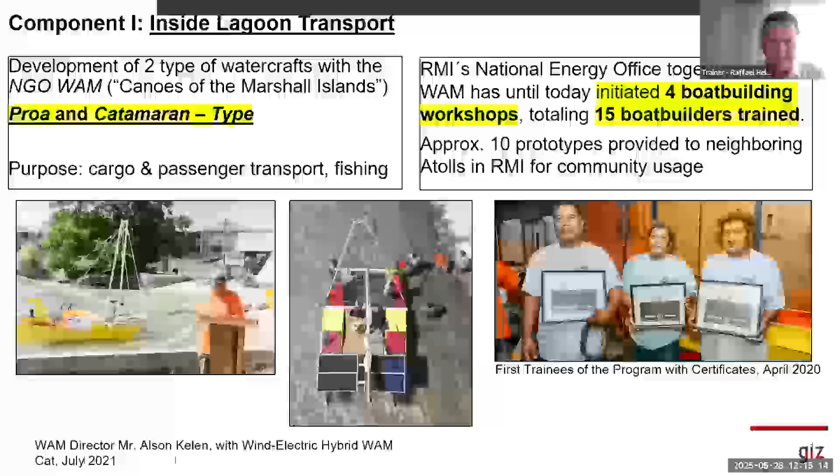As I said, the first component, the inside lagoon component, was one of the components that started first, around 2019. Hendrik was one of the consultants, a boat designer and naval architect, to design new concepts, new boat designs that can be built locally, operated locally by Marshallese people, and as well maintained locally.

This project component is closed from our perspective at the moment, but the National Energy Office has continued to financially support the NGO Waan Aelon in Majel, which means the Canoes of the Marshall Islands, in the medium term, to continue building and deploying those boats.

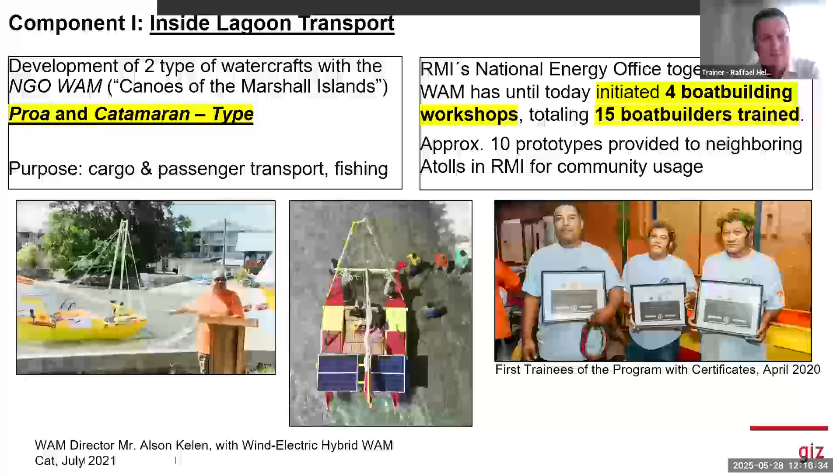You can see here on this slide, at the moment, one of those hybrid designs we came up with as a prototype in 2020-2021, where, to the outrigger catamaran, which you'll see more precisely on the next slide, a small solar panel was mounted together with an electric outboard engine to already show what could be possible with very small, minor effort, built by the people there in the Marshall Islands.

This is not really what I foresaw, but I tried to keep track. At the end of the day, this component was concluded last year with the publication of two construction manuals, one for each of those designs. They are publicly available online, the link is shared in this presentation, and you can just download those manuals, and if you wish, you can even build yourself such a boat. We are very happy with this outcome. The knowledge shall be shared more into the Micronesian region soon, and actually the project is continued. I will share a few words about this later.

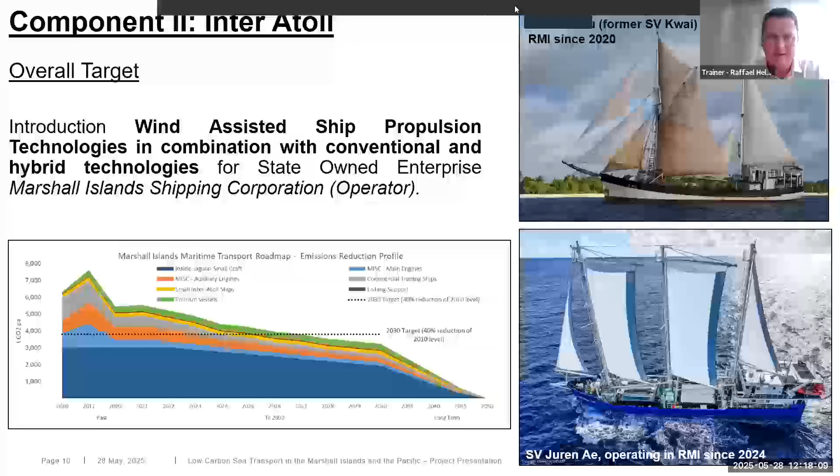Coming to the next part, sorry to cut you. Would you like me to share your presentation instead? Yeah, you can do that. Slide number 10 now. Sorry. Oh sure, all right, one moment. Thank you, that's great. Sure, that's going to be more comfortable, especially now. All right.

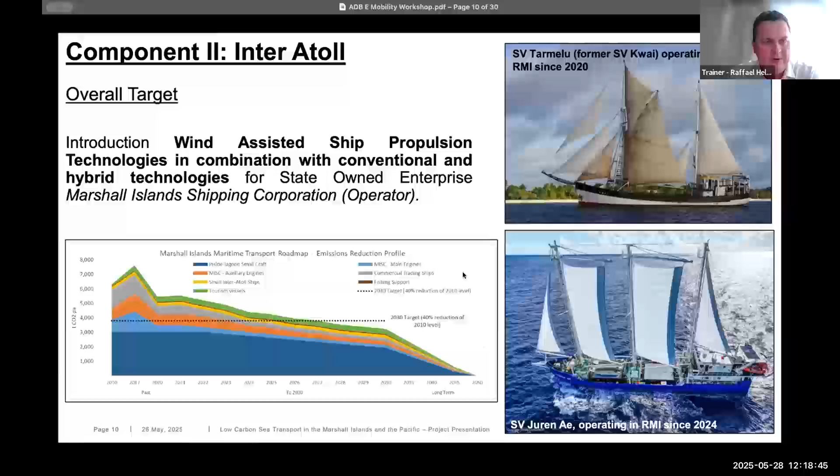More the focus will be on this component. This component is not yet concluded. What you see here on the first slide, the inter-atoll component, is basically what we want to, or what we did introduce for the Marshall Islands over the last few years. The background here is that the Marshall Islands, consisting of about 29 atolls on a very large sea surface area, need and depend on the regular services of ships this size, about 500 gross tons. Those ships are operated by the government of the Marshall Islands, the state-owned enterprise Marshall Islands Shipping Corporation.

The Marshall Island Shipping Corporation, MISC, is by legal act meant to provide shipping services to the outer islands on a regular basis. We've been trying to come up with a concept ship that would operate on much lower fuel consumption. What you see on the right top side is the sailing vessel Kwai, some of you might be familiar with. The Kwai was operated between Hawaii, the Line Islands in Kiribati, and the Cook Islands over nearly two decades, until the Kwai was purchased by the Marshallese government at the beginning of the pandemic in 2020. The Kwai served as a model and a research ground, basically, to develop the Juren Ae, which you see on the right bottom.

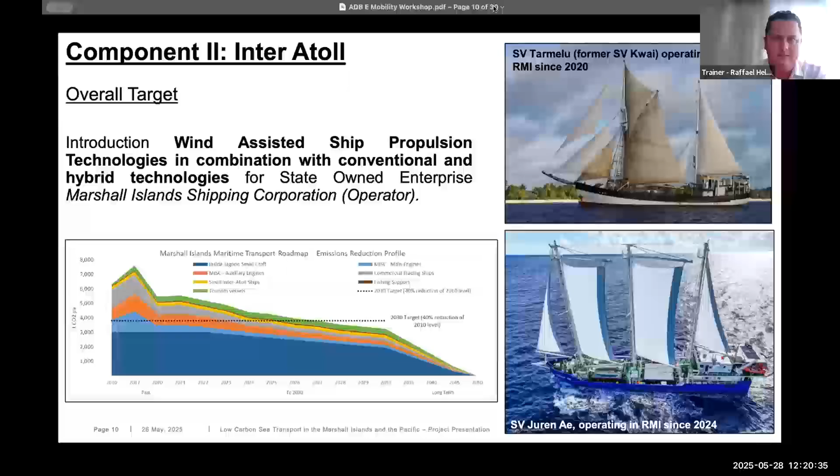I couldn't go over to the next slide. Just a second. Okay, well, thank you, Christina.

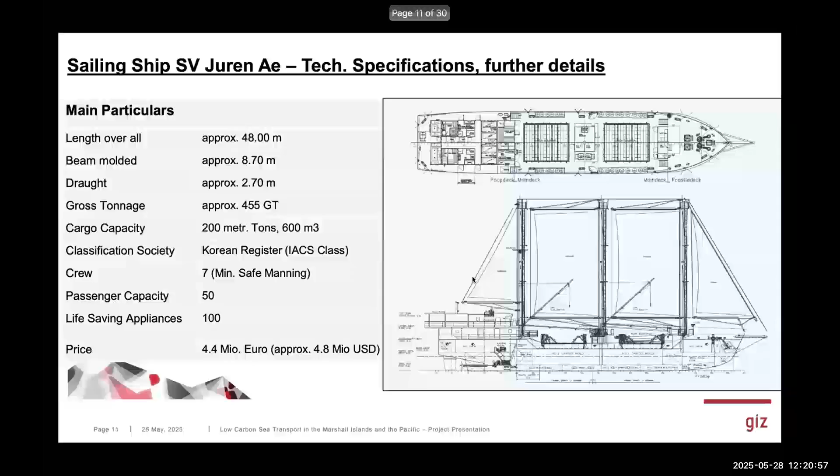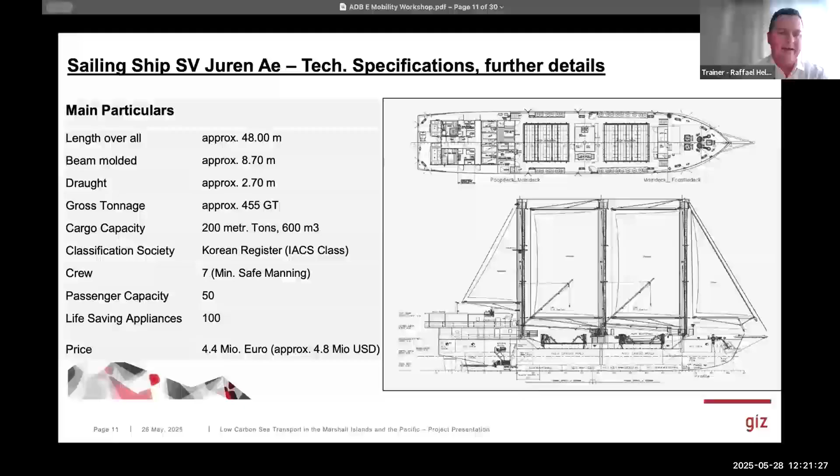We see here the technical specifics of the ship, and I think I mentioned a few already. The ship was built based on a very comprehensive needs assessment in the islands, which we undertook at the beginning of the project. This is the outcome. Eventually, the ship was built in South Korea with a total budget of about 4.4 million euro, which equals about 4.8 million US dollars at the time I made this presentation.

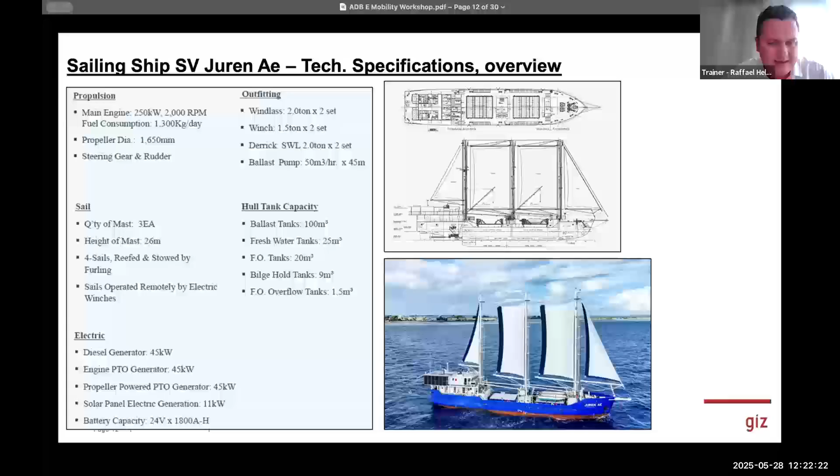There's some more specifics about the vessel. At the end of the day, the ship does fulfill all those very special island requirements we analyzed over the years and is now operating in regular domestic service. I want to highlight that the ship is internationally registered under the international flag of the Marshall Islands, and is also built under IACS class under the Korean register. We are still working on certain elements of the ship, in particular the sailing rig, the Indo sail rig, that was developed in close partnership with the University Emden Leer and other external partners, including the shipyard in South Korea.

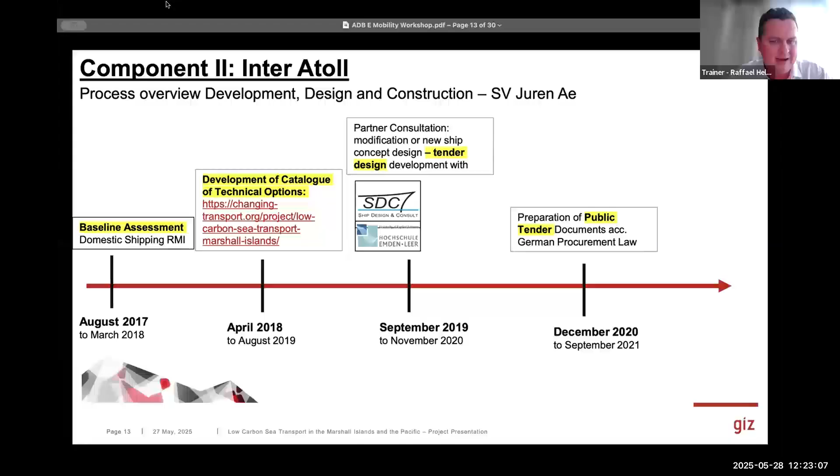Just to give you an idea how long this took: we started in 2017 after a very comprehensive baseline assessment. A catalog of options was developed, and eventually the Marshallese government and all those project stakeholders agreed to build a new ship, to design a new ship, because the alternative at that time would have been to modify an existing vessel. We found this joint decision to go for a new design, and this design process took over the years 2019, 2020, until we could start the tender in 2021.

From the tender, the bidding process, it took another year until the contract got negotiated and construction started eventually in 2023. Last year, the ship was finalized in June. We sailed the Juren Ae over to the Marshall Islands in July, and now she is operating in the Marshall Islands.

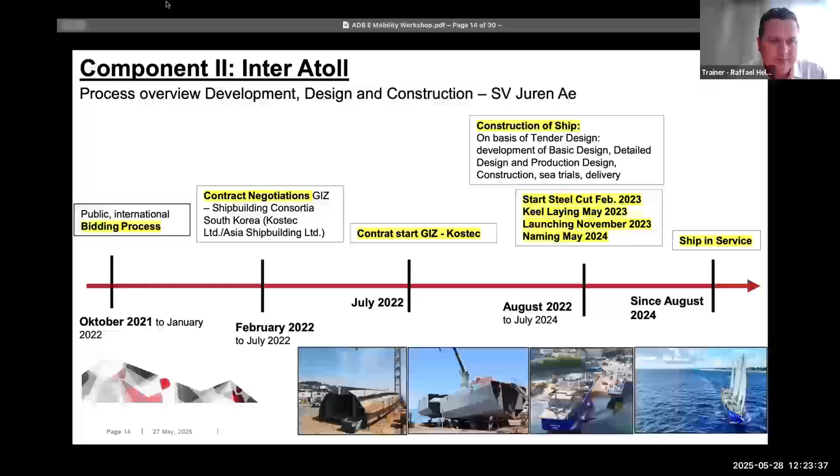As you see, the ship was received with very high interest from the government. In the meantime, I see that neighboring countries are also very much interested in this type of technology. I want to elaborate a bit more in detail, particularly about the electrical propulsion.

One aspect of our work is training. There was a training center established. We're currently developing further courses, also with a focus on electrical propulsion - that's something I'm sure Henrik will mention a bit later in more detail. The training is absolutely essential. Until now, seafarers in the Marshall Islands haven't really achieved a lot of capacity building before, and now this is more regulated. It's hosted by the College of the Marshall Islands, the National College, basically, and the first graduates are already working in the shipping sector now in the islands.

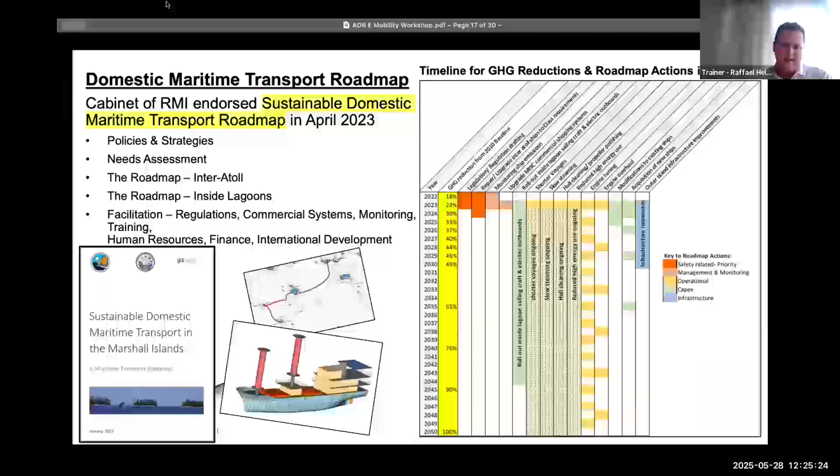One major policy document that got established and endorsed two years ago by the Marshallese government is the roadmap for sustainable domestic maritime transport. This roadmap paves the way for full decarbonization until the year 2050, and is also available if you would want to have a look how the Marshall Islands developed such a document and how they go about implementing the different activities resulting in the final goal to decarbonize the domestic shipping sector in the Marshall Islands.

This will bring us to the last section. I will try to give you a few more details about the electrical components in the new ship. I will start here with the parallel hybrid transmission, PHT. PHT was a system we purchased in discussion with the Korean shipbuilder, in Belgium, with the Belgian company Esco Power, and Esco Power installed this system, and we're now testing it. There's still room for minor improvements.

I can also elaborate on a bit later, but generally what we achieve by this system is basically a higher rate of redundancy in the ship system itself. And of course, we can reduce the fuel consumption and be much more flexible if the ship is sailing. It even allows us, if the ship is sailing in fair conditions, to generate up to 45 kilowatts of electrical power that can be stored in a battery system or fed into the hotel load of the vessel, basically allowing for zero emission ship operation in certain conditions.

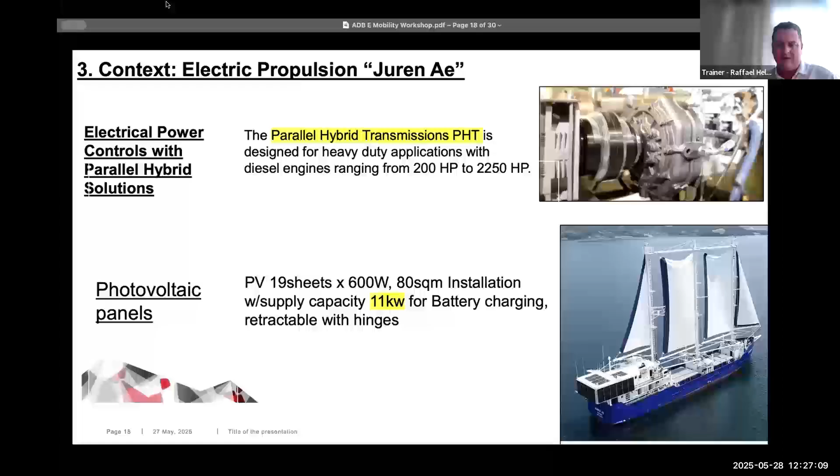As well, the ship is equipped with an 11 kilowatt PV panel system that is retractable, foldable. You can see it on the right bottom side. Now it's basically not in full operation, but when the ship is sailing, those panels on the stern, on the starboard side, would be put up with hinges and then can increase the surface area. We can continue, Christina.

So as I said, this system allows for higher redundancy as well as flexibility. We see five operating modes to propel the ship. For example, we can just use the main engine, a diesel combustion engine, together with the power takeoff mode. We can only use the power takeoff mode when the ship is sailing, as I said before. We can use the propeller in the milling recuperation mode. And as well, we intend to use the power take-in mode, which is not fully functional yet, but this is something we want to continue to develop with the engineers.

That's our mission. Now we have 2 years left. And of course, the goal is to have the best design for the second order. I can say that the neighboring country, FSM, is very much interested to have a similar ship, and those lessons learned will feed into a revised design.

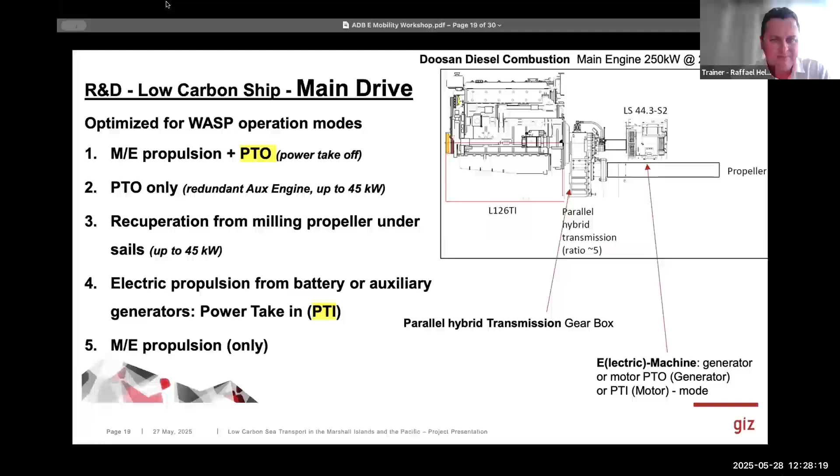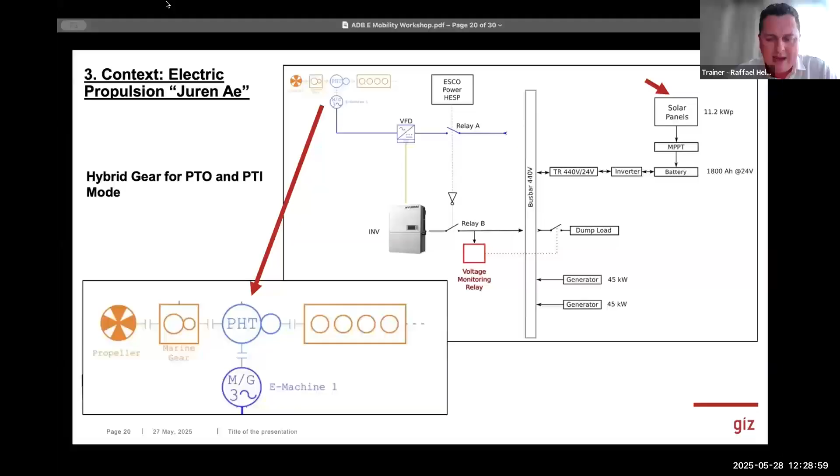We can continue. I think that's another piece of background information. We're talking about e-mobility. The Marshall Islands, since 2018, have had the electricity roadmap in place, and I would rather consider our maritime roadmap as an add-on. We can continue to the next slide.

That's what I already mentioned. Both framework documents are guiding the way for the work that is done in the Marshall Islands. In particular, of course, we're working on the maritime sector, and I'm going to show you just a few more slides before I conclude, because we have 20 minutes.

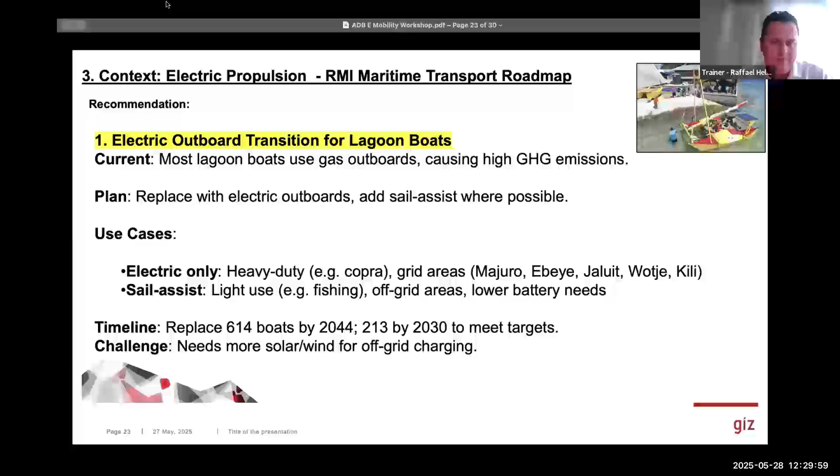Of course, the infrastructure needs to be improved in the Marshall Islands. That's something that is ongoing. I can literally see it being there now for nearly a decade. I can see that the amount of PV panels in the city of Majuro is increasing drastically, and the entire power grid in the urban area is improved over the years. I do see strong improvements in that sense.

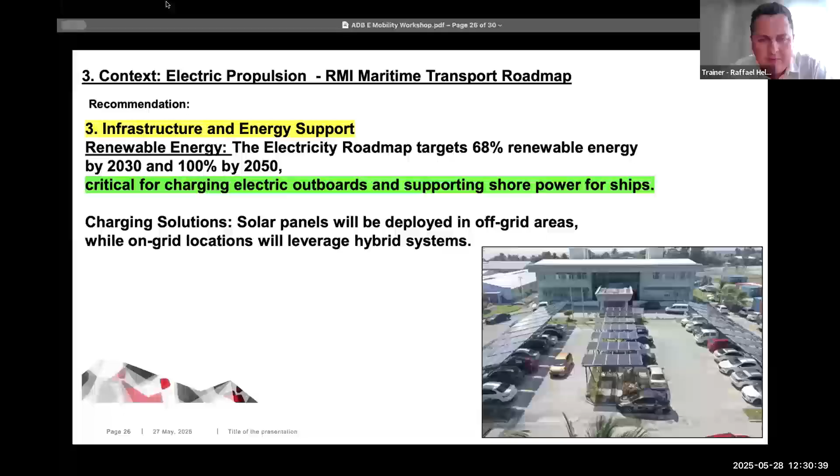The next one, please. Yeah, I think I would leave it to that with my overall insight, talking about the pilot project that is implemented by GIZ and many other partners in the region and globally. We are very happy about the outcome. I can say from my perspective, this is a good start. We've been working there now for 8 years. I think it is only a start. So I think I'm convinced that we have to continue in all those different areas.

And I'm very much excited as well to see now the presentation from Henrik and Jonas, because the interest is there. The people in the islands, they really want to go down this way and use fossil fuel free transportation means, especially in the maritime sector, being so dependent on maritime transport in the islands. I think in the Marshall Islands, we've been lucky to have such strong and interested, innovative partners.

I hope we can extend and share this knowledge in the upcoming years also more in the larger region, but also beyond the Pacific Island region. Thank you very much for your interest and attention. And if you have any questions, I'm happy to answer them. I'm concluding now at 20 minutes because those details I've basically shared.

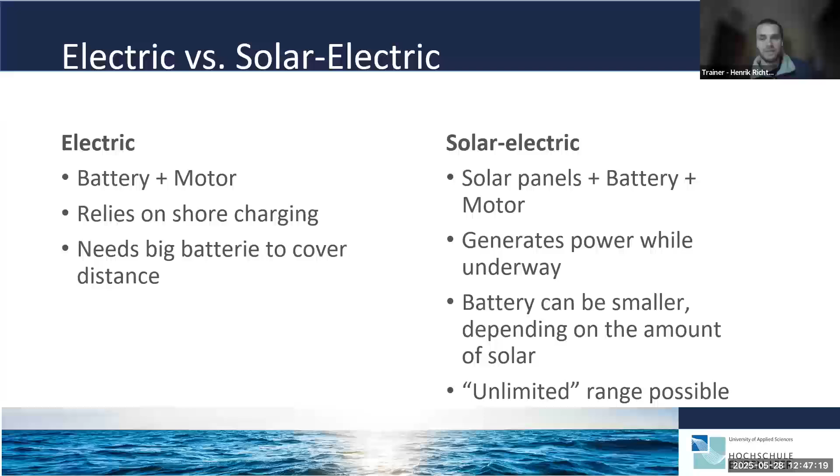In the following slides, I'll be talking about light solar electric craft. Jonas will later also talk about heavy solar electric craft. What I mean by that is we're limiting the system voltage to 48 volts here. That is often done because 48 volts DC is considered safe—you can touch it, you're not going to get a shock. It's easy to handle, also for amateurs. It's usually easier on the regulation side, and just in general safe to work with, and kind of the standard for this size of vessel. Length can be up to 15 meters, displacement up to 15 tons—though then we're already on the pretty heavy side—and propulsion power up to 20 kilowatts.

When you go much beyond that with 48 volt systems, you will either end up with a lot of engines or with very, very thick cables, because somehow the power, the amps, has to go through the cable, and then you need a lot of copper. So it doesn't really make sense to go beyond that. Also, you will have a hard time finding engines.

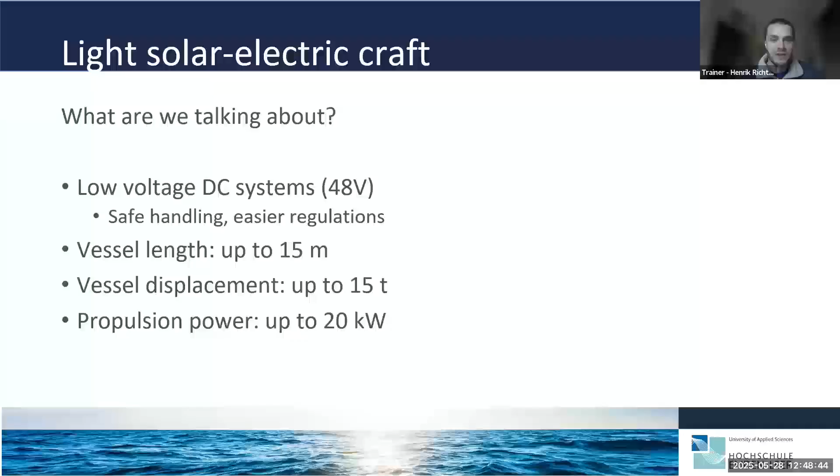Okay, let's have a look at the basic components. What you see in the background is a project we've been working on for UNDP—a design study. It's now going to be built, similar to this one but a bit different, in New Zealand for island supply in Samoa.

Maybe let's start at the engine. Of course, there's an electric engine. In this case, it's an outboard engine that you can just buy readily available. It has the same connectors and same mounting system as a regular outboard engine—looks basically the same. The only difference is it doesn't need fuel, and you have to plug it into a power source.

Usually in these kind of vessels, there is always some sort of battery storage as a buffer, because the solar power is not always reliable. So when you have clouds, or different orientation of your panels, or you want to go at night or late in the day, you have very big fluctuations in your output. So you need this battery to have a constant power supply for the engine.

Theoretically, that would also work without one, but then we are really talking about extreme examples. I've seen some very low budget boats which just connected the solar panels to the engine directly. It's possible, but not really recommended. Battery size, of course, is always a discussion and needs to be carefully designed for the intended application.

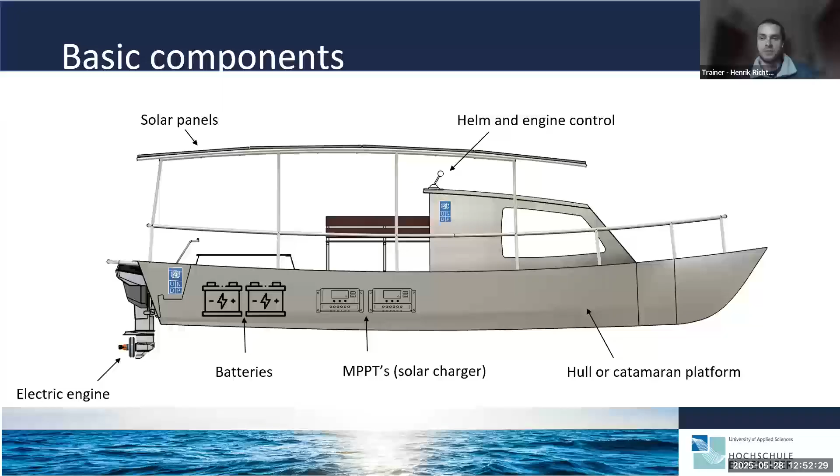And of course, what you need is a hull, or in this case, this is a catamaran platform. We're seeing it from the side, so you cannot see the other hull. Catamaran means it has two hulls. We'll also look at that later in detail, why that's beneficial for this sort of application. At first look, you can also use existing boats, retrofits are possible, but there's definitely a benefit of designing vessels, also the hulls and the structure, for solar electric propulsion.

Okay, quick details about all these basic components we've just talked about. Panels: in previous projects, this has always been a major debate because somehow this was very important for the stakeholders.

Almost all of the solar panels you can find are manufactured in China today. Sometimes you find 'made in Germany' printed on them, especially I see that a lot in Africa. I can tell you it's fake, we have hardly any solar industry left. They all come from China, and the difference in quality is mainly superficial. Usually what you can buy is fine, so this is usually a no-brainer.

The bigger difference is more in the flexibility and rigidity of the modules. You can get flexible ones, you might know them from applications on yachts or for camping, and they are much lighter, but they have a limited lifetime. They get advertised as being flexible so you can bend them into round shapes, but it's actually damaging them. So the main advantage is they are lighter.

And then on the other hand, you have the rigid glass modules with aluminum frame for house installation or domestic use. They're usually rated up to 20 years of lifetime with guaranteed power output. Usually they are locally available around the Pacific region, probably at a high price. So your choice mainly depends on what is available, what is the price, what is the weight. In particular, when you put them on a boat, weight is always a concern because you don't want your boat to tip over.

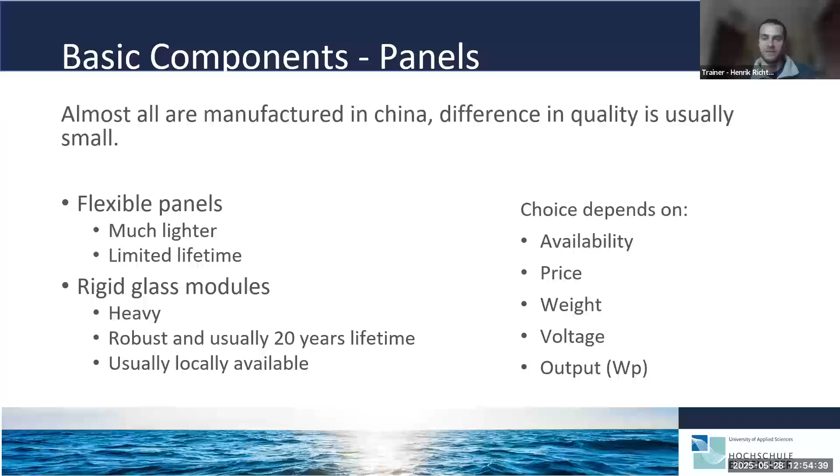And then what counts is the voltage at the output, because the voltage has to fit to these solar chargers, these MPPTs I've mentioned before. MPPT actually stands for maximum power point tracker. What these guys are doing is regulating the output current and voltage of the solar panels, because power is the product of voltage and current, so amps times voltage is watts.

And you want to maximize your power output, your watt output. So you need to find the maximum power point, and this is what these guys are doing. It's basically small microcontrollers adjusting that all the time according to the environmental conditions, and then feeding it into the batteries.

They are a little bit more expensive than other technologies, for example PWM solar chargers. PWM can also be used on smaller systems, but they are far less efficient. I'm not aware that they are available on a very big scale. So when you go beyond a very small panel, like for a solar light or something, you're going to end up with MPPTs anyway, and they boost the performance of your system quite a lot.

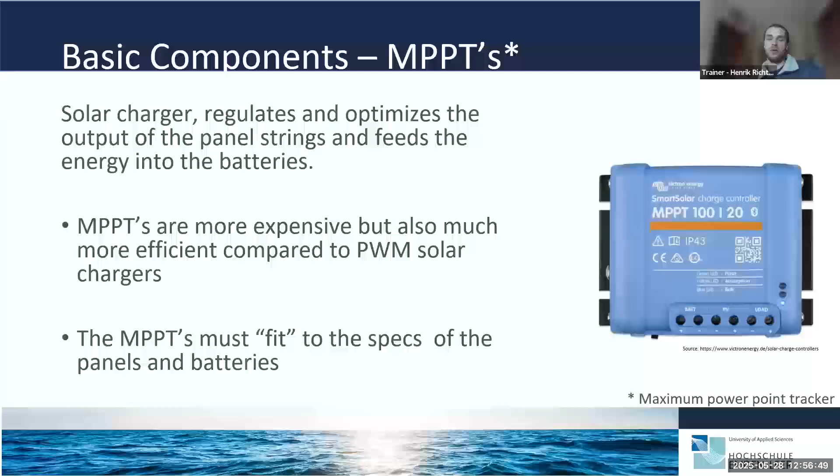Next basic component are the batteries. Recommendation for the type of vessel we're talking about here is lithium iron phosphate, or LiFePO4. That's a type of technology different from what you see in most electric cars—a little heavier than the lithium batteries in cars, but on the other hand, way more safe. They can't explode, they cannot catch fire, and they're also a bit more affordable.

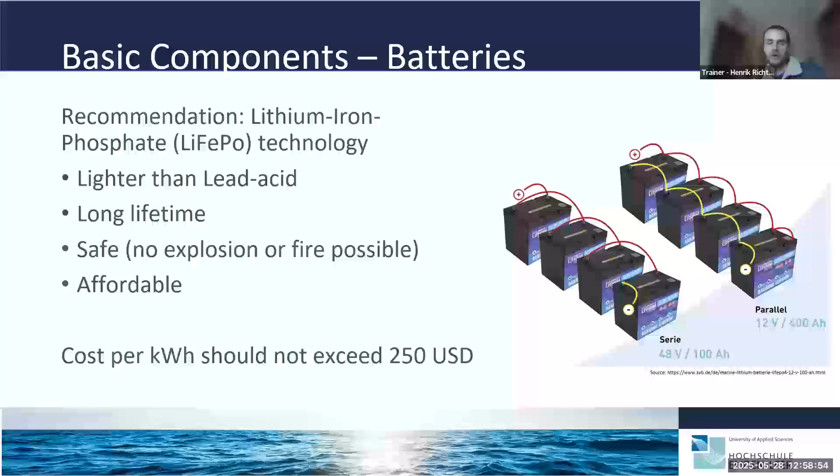Costs you can expect here are around $250 per kilowatt hour, shouldn't be much more expensive than that. But as you can see, this is a price driver. If you have 20 kilowatt hours installed in your vessel, then we're already talking about $5,000 as investment cost just for the energy storage. So you always want to keep your battery size small.

Next part, the engines. There you basically have two options today: outboard engines and inboard engines. Outboard engines, I guess that's commonly known—it's just what you put on the back of your boat. You can buy just the product, put it on, and use it. There are a couple of manufacturers.

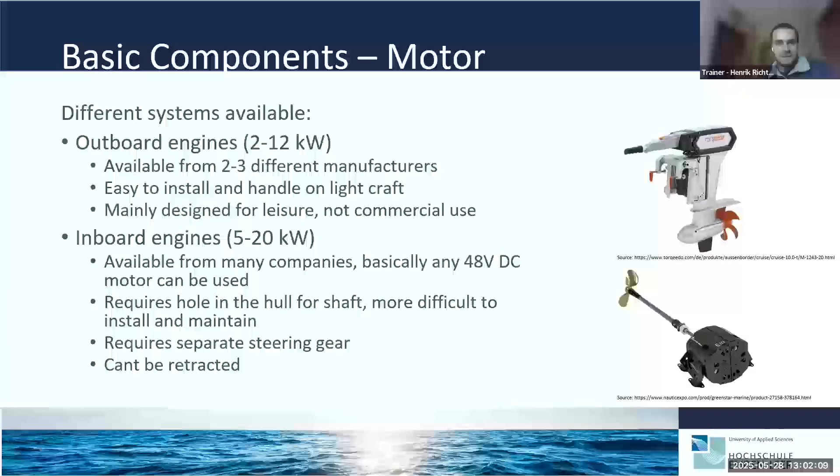Shore connection for charging from the public grid if solar is not enough. This has always been a topic coming up quite frequently, and I've seen projects starting to talk about setting up charging stations similar to those you see for cars, with car chargers and very expensive equipment. From my point of view, that is not necessary at all.

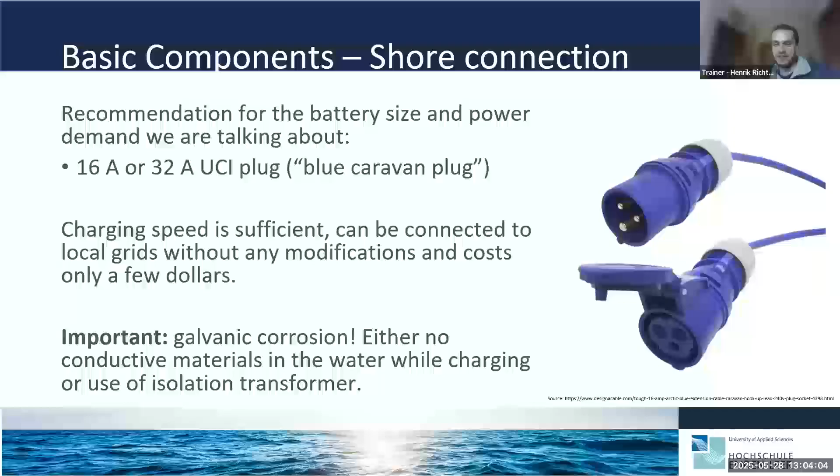One important side note: when you consider shore charging, not only relying on solar, you have to keep galvanic corrosion in mind. I will not go into the depth of it, but this is definitely a topic you have to be aware of, especially if your hull is aluminium or steel, or you have an inboard engine where the engine is always in the water. If you don't take care, this can destroy your vessel in no time, so you have to be really careful about this.

What we often use for that reason are catamaran designs with two hulls, where we also have way more deck space for cargo, for people, but also for the canopy and the solar panels. So we have more area and just more power in our system, and at the same time a more stable platform. From my point of view, these catamarans are really well suited for this type of propulsion technology.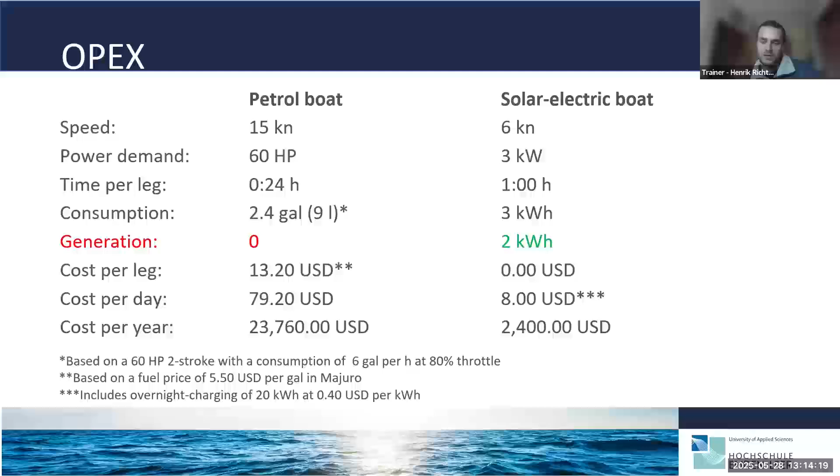Maintenance and upkeep is roughly the same. So in the end, over a period of 15 years, the costs for the petrol boat amount to $365,000, while the solar electric boat is just at $60,000.

This already includes a battery swap after 7.5 years or 3,000 cycles at 60% depth of discharge, but does not account for that the old battery could be sold or used for other applications at their reduced capacity because it's not broken.

So there's a huge benefit already on the cost side for just investment and operation of a solar electric vessel compared to a petrol boat. And what does it mean? We have roughly $20,000 saving per year in this scenario.

And these $20,000 stay in the country. They are not blown out to buy petrol and finance someone's skyscraper. So this is just money that stays in the country and can be invested locally for communal benefit or for expanding the business. So there's just a really large potential that I see in this technology.

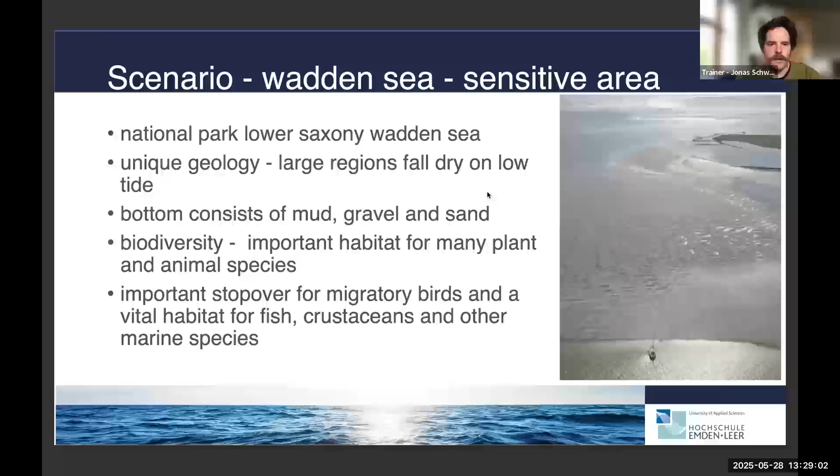In the picture on the right, you can get an idea of what the sea looks like here. If you're used to sand beaches and blue water, it might not look that nice to you. Nevertheless, it's a very important habitat for many plant and animal species, with huge biodiversity, and the whole region is an important stopover for migratory birds and a vital habitat for fish, crustaceans, and other marine species.

Because of this, shipping companies face special challenges. Some harbors of the islands are only reachable at high tide. This depends on the position of the harbors. If harbors are positioned on the sides of the island, they are closer to the outlets.

In between the islands, there are stronger currents and deeper water. If the harbors are positioned in the center of the island, there you have less current and more shallow water. All goods and personnel are mainly transported by ships to the islands, and tourism is the main economic sector on these islands.

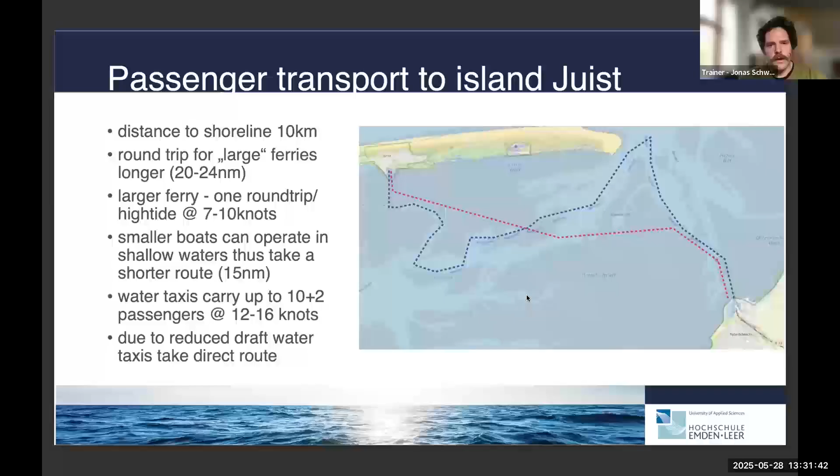Somehow this stands in strong contradiction to what this whole area stands for, like we have strong biodiversity. Nevertheless, this fast transport emerged due to the fact that there's only one ferry to the island, and people are willing to pay more to get faster and more often to the island. This is where our project was developed from.

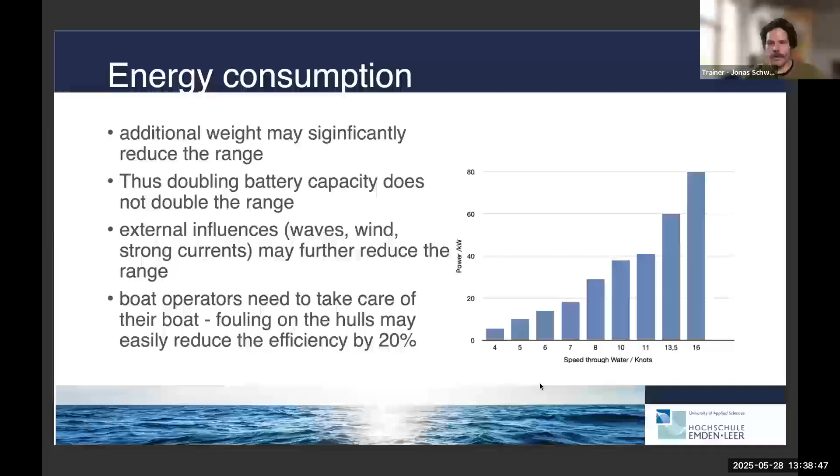What we are doing here at the University of Applied Sciences Emden Leer is introducing a curriculum for energy efficiency in ship operation, so students get in touch with these new propulsion technologies. These are students who will work in the nautical industry later on, and they get to know these new propulsion systems while we raise awareness for the challenges in sustainable sea transport.

We are executing measuring runs to determine dependencies. The great thing about these electrical engines is that they give direct feedback to changes regarding trim, additional loads, or even external influences like wind and waves, or increased resistance by fouling.

All this is monitored with a data logger, but nevertheless the students are also asked to make their own notes. This is part of the curriculum. They record the data by hand, reading it from the display, and they need to protocol it.

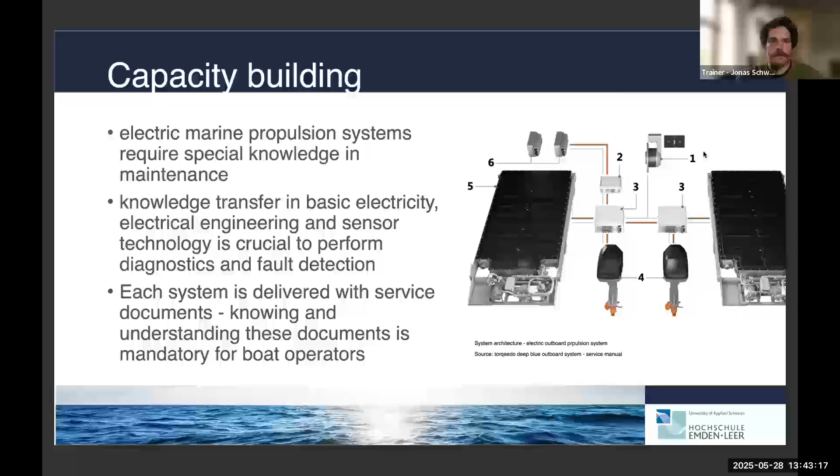If we would implement this project again, I would say charge rate is the game changer. The battery technology of the green water taxi is already rather old - it is from 2013, and the typical charge rate for this project is 0.25 C.

The charge rate is the measure of charge and discharge rates relative to the battery's capacity. A higher charge rate allows faster charging. For our battery, which is approximately 80 kilowatt hours, we can charge with a maximum of 20 kilowatts. So it takes us 4 hours to charge from 0 to 100%.

And if you keep in mind that you don't want to go below 20%, because you want to keep a reserve, it takes at least 3 hours to fully charge the battery.

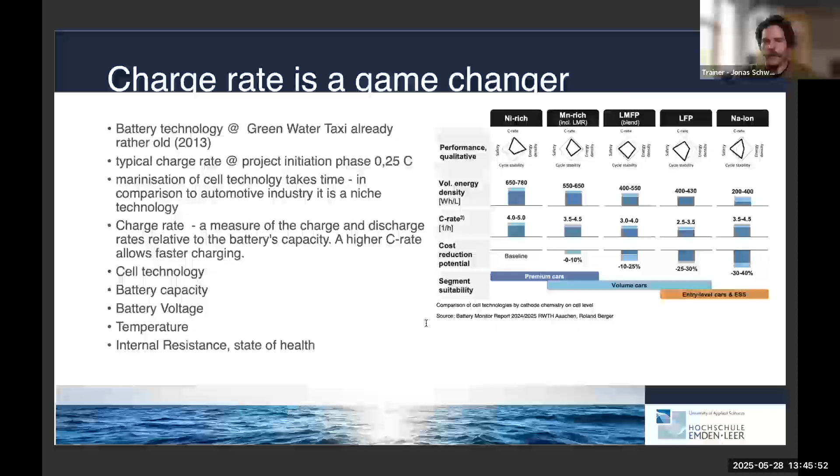What have we learned from this project? We have learned that higher charge rates would allow recharging while passengers are boarding and deboarding. The latest cell technologies allow charge rates up to 3C, meaning we can charge from 20 to 80% in 15 minutes.

Nevertheless, this also implies difficulties. High charging rates require additional infrastructure at the dock. If you calculate 3C for our 80 kilowatt hour accumulator or battery, that means we are charging with 240 kilowatts.

So such a maritime e-mobility concept can be divided into different subsystems. You have the hull and the propulsion system, batteries and a battery management system, plus eventually an onboard charging system, and you need the dock and the charging infrastructure, plus the electrical supply line.

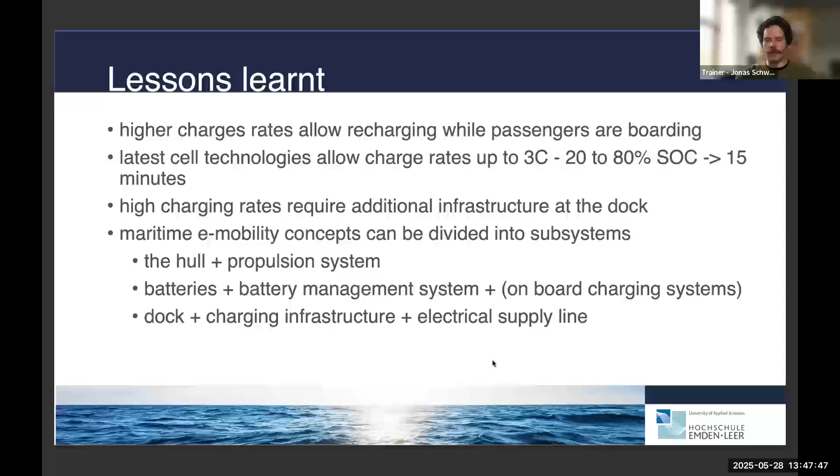This is one point which I really want to emphasize. In remote regions, such an electrical supply line for charging with high currents may be really challenging. Even here on the German shoreline, these charging electrical supply lines are difficult because you need to get the energy there, and we are talking about currents that can't be delivered by a normal 220 volt plug.

What else have we learned? The project amortization for pilot projects may not always be the primary target. Nevertheless, funding may help to build up local capacity.

And what was the result of the project for the green water taxi? The shipping company, Frisia, that also took part in the project, realized that scaling effects and the cost of the crew must be considered. That means if you have less crew and more passengers, the return of investment or amortization may be better.

In the end, they introduced the Frisia E1 this year, which is a fully electric catamaran that can carry up to 150 persons. It doesn't navigate to the island of Juist, but to the island of Norderney, which is to the right of the island of Juist.